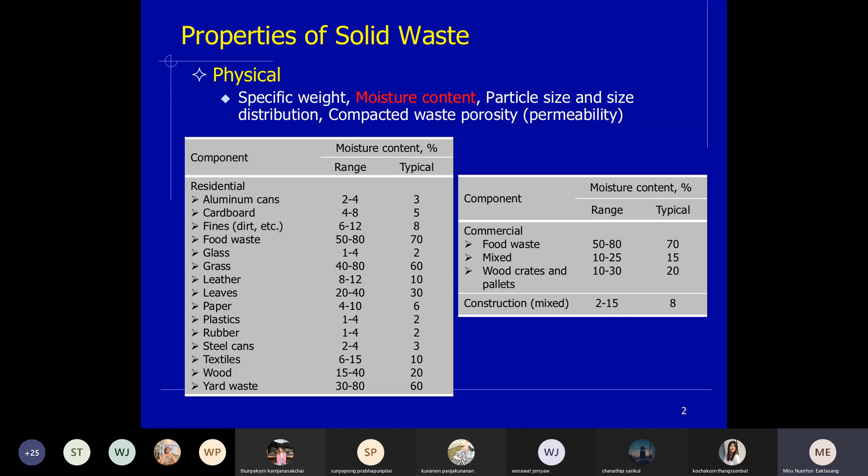Also for the other properties, like chemical property of the solid waste, for example proximate analysis, ultimate analysis, and energy content. This property is very important because it can be used for evaluating alternative processes and recovery options. For example, if we know the energy content, we can decide on a combustion process or use it as fuel or RDF resource from the solid waste.

Also, if we know the chemical property about elements like carbon and nitrogen, we can decide for making compost. An example of proximate analysis: normally we analyze the proximate for combustible components, meaning the volatile organic compound, the solid like total solid, and ash content.

I will explain more about the proximate analysis. For the ultimate analysis, it can be divided into three major analyses: the major elements like carbon, hydrogen, oxygen, nitrogen, sulfur, and ash. These are the major elements in solid waste that we have to know to design, sometimes we can use the benefits of this property for making compost, like knowing the carbon per nitrogen ratio that's appropriate for degradability or not.

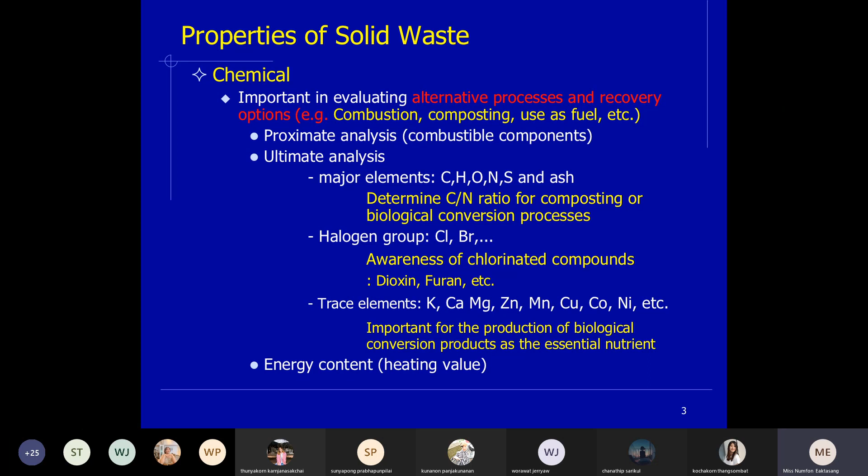The energy content is one parameter we have to analyze in the chemical properties, because if we want to use solid waste as an energy resource, we have to know what kind of solid waste contains a high heating value. If it's a low heating value, thinking about cost-benefit analysis, maybe it's not appropriate to make energy resources from a combustion process.

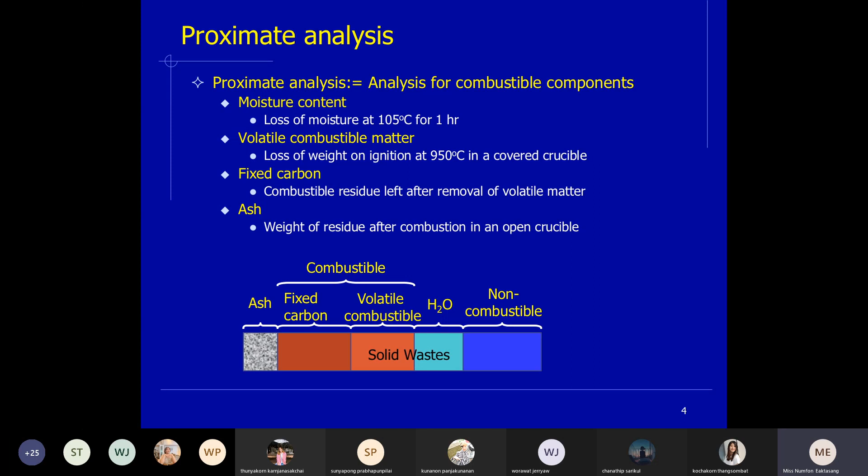This shows the proximate analysis. The proximate analysis is the analysis for combustible components, which consists of the moisture content, volatile combustible matter, fixed carbon, and ash. This is just an example of the proximate analysis we have to know in the chemical properties.

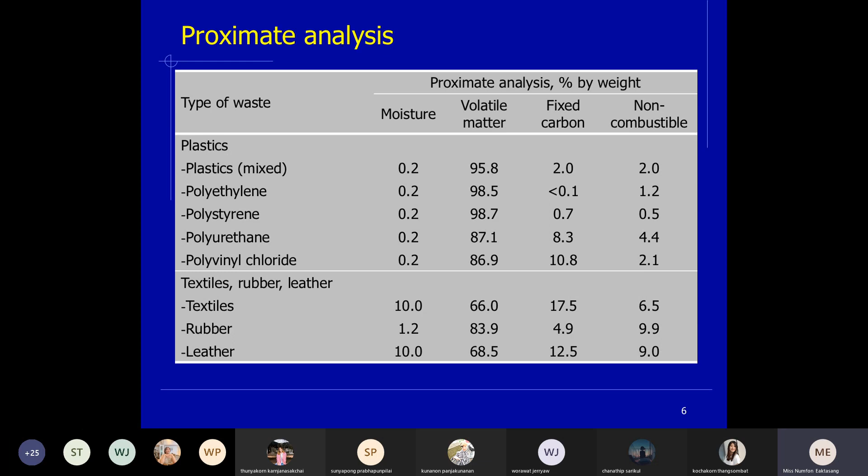This also shows different types like plastic, textile, and rubber. They also contain high volatile matter, so it's easy to burn. If we want to separate some kind of waste and feed it into the incineration process to use as an energy resource, we have to look at this property too - not only the heating value, but also the volatile matter and moisture content.

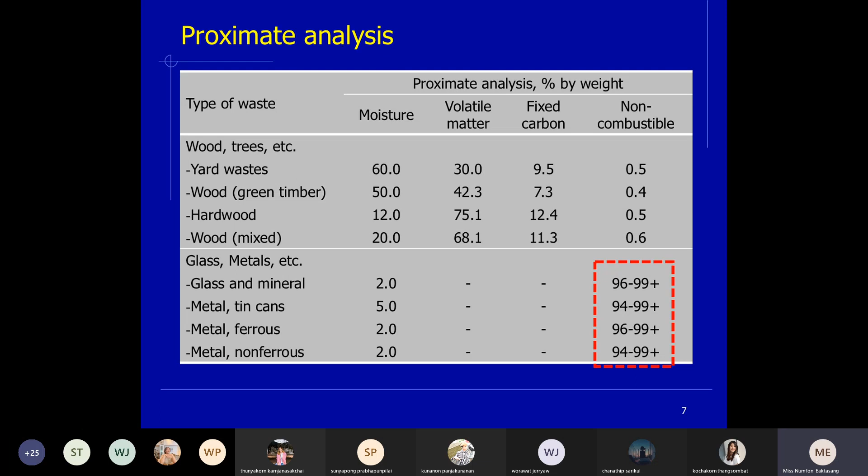You can see from other types like non-combustible waste - glass, metal, or tin cans - the volatile matter cannot be analyzed. It means it's low detectable, sometimes non-detectable, because it's difficult to burn. So we can separate this kind of waste as non-combustible.

The ultimate analysis is also a very important parameter - we have to know the carbon, hydrogen, oxygen, nitrogen, and sulfur content. The nitrogen and sulfur content is an important parameter because if solid waste contains high nitrogen and high sulfur, after the burning process - if we use incineration to dispose of the solid waste - it can cause nitrogen dioxide or NOx, and also sulfur dioxide, which is air pollution. If we know some solid waste contains high nitrogen and high sulfur, maybe we should separate it for disposal by other processes, like composting or landfill, rather than putting it in the incineration process.

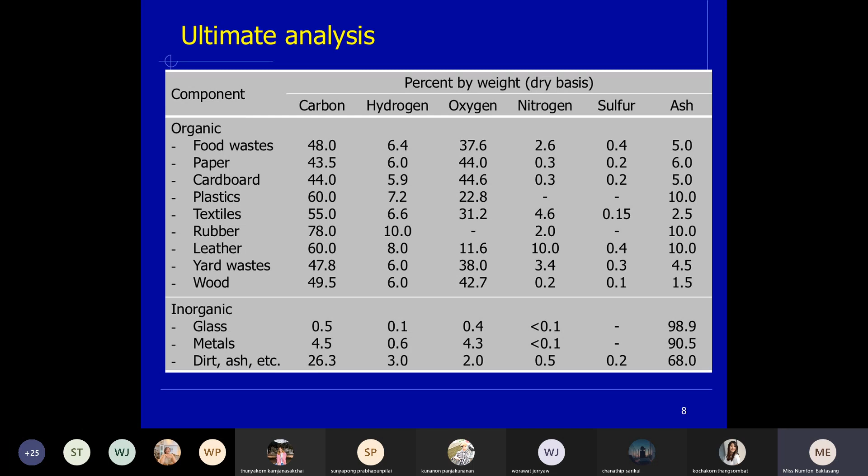It's quite different from the inorganic part. For the inorganic part, the ultimate analysis shows low carbon, low hydrogen, low oxygen. Normally we use the property of the ultimate analysis to determine the biodegradable process and the incineration process.

Another factor for chemical properties is energy content. As I said, if we decide to separate some kind of waste with high heating value to put into the incinerator and use it as an energy resource for waste-to-energy, we have to choose waste like plastic, textile, or rubber - they have quite high energy content. But compared to food waste, you can see food waste is lower than paper, plastic, or rubber.

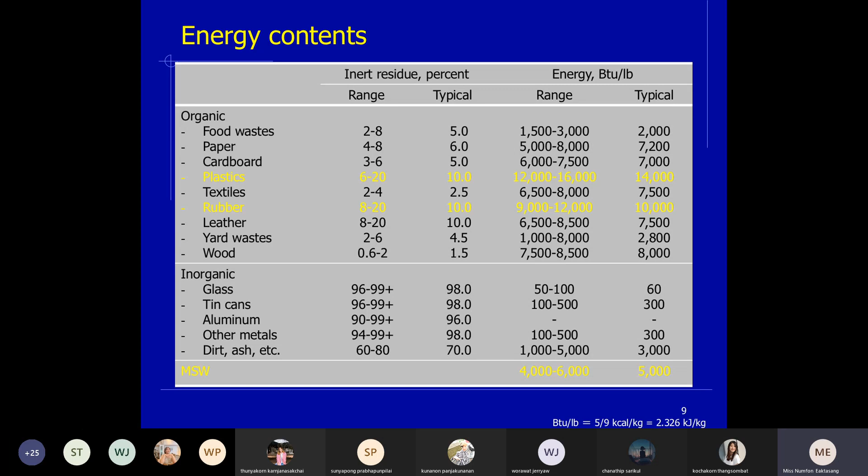This is because food waste also contains carbon, but the high moisture content can reduce the energy or heating value.

Another property of solid waste is the biological property. This is an important factor to look at in solid waste - whether it's easy to degrade or not. During the degradation process, there are aerobic and anaerobic processes, and some can cause a bad smell or bad odor.

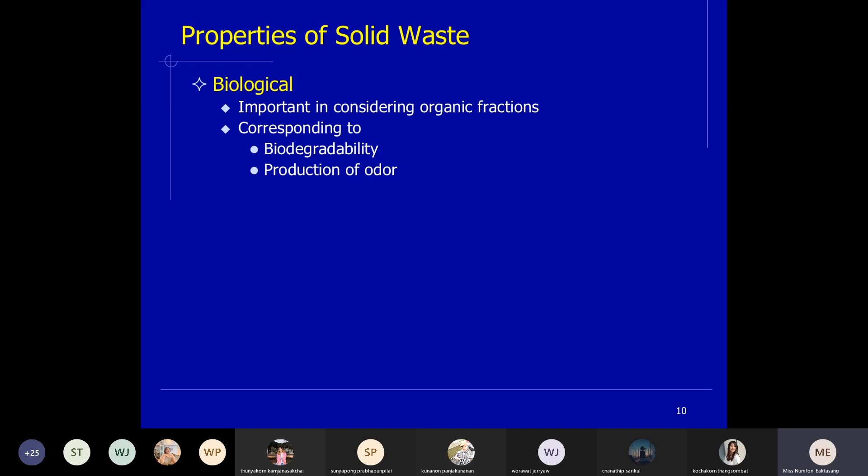The indicator to identify easy or difficult degradation in a biodegradable process: we look at the lignin content. If high lignin content, that means it's difficult for microorganisms to degrade. That's solid waste. We can look at lignin content as an indicator for biological degradability.

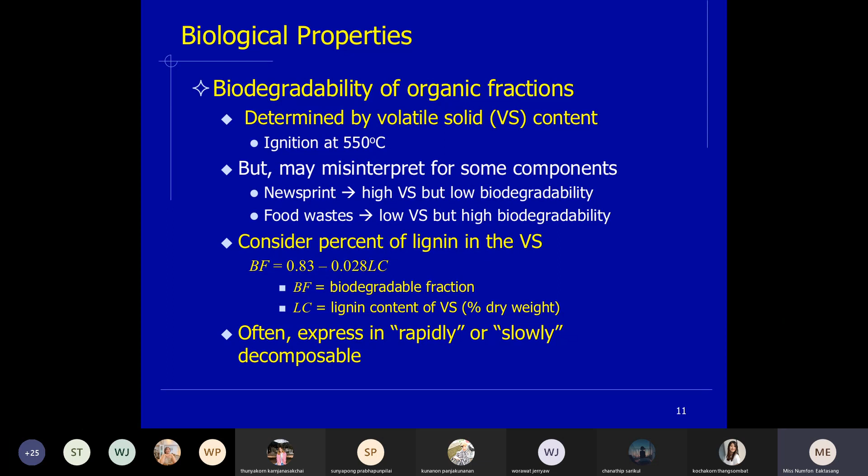We can know if it's rapid or slow during the degradable process if we know the contents of lignin. Another property is the production of odor, as I said, which is a biological property, meaning this kind of waste is easy to degrade.

It also contains some parts of sulfur. During degradation, it can cause sulfate to change to sulfide, and sulfide combined with hydrogen can cause a bad smell, like hydrogen sulfide. These are the bad odors.

That can occur from organic material, and also if it's easy to degrade, it can cause breeding of flies. This is the source of vector transfer of disease to humans or the environment. This is an important biological property of solid waste.

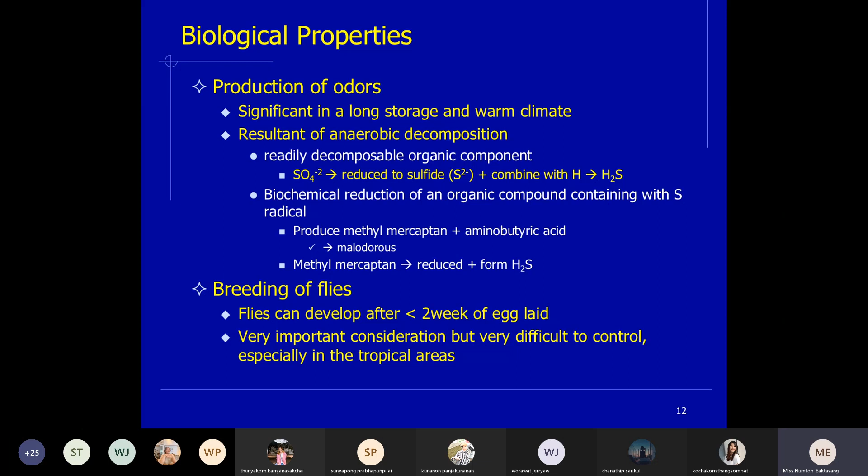After we know the property of the solid waste, we can design the appropriate transformation process. For example, if we know the size, heating value, proximate or ultimate content, we can decide if this kind of waste is appropriate for a combustion process or composting, something like that. Also, if we know the property, we can decide the recovery method.

Some kinds of waste have high energy content, so maybe we can use it as an energy resource. This is one method for recycling material to feed into making electricity, like waste-to-energy products.

This is the property of solid waste that we can use to design the collection system, transportation, separation, and processing to create other benefits. We can also design the disposal method appropriate to each kind of waste.

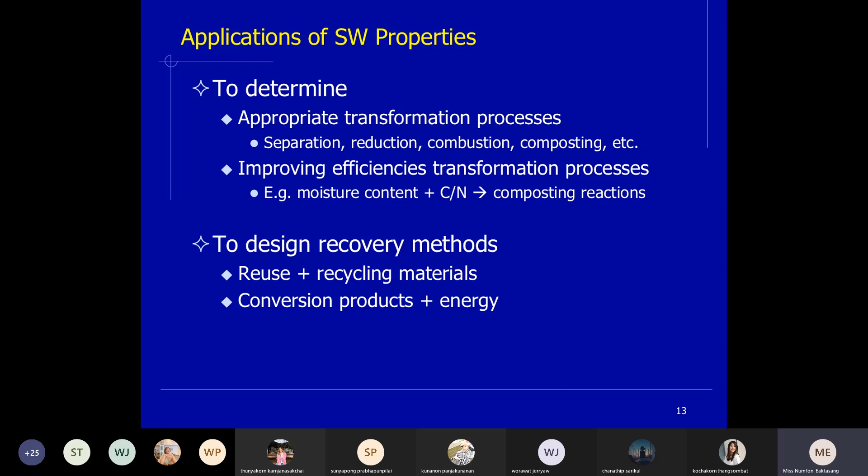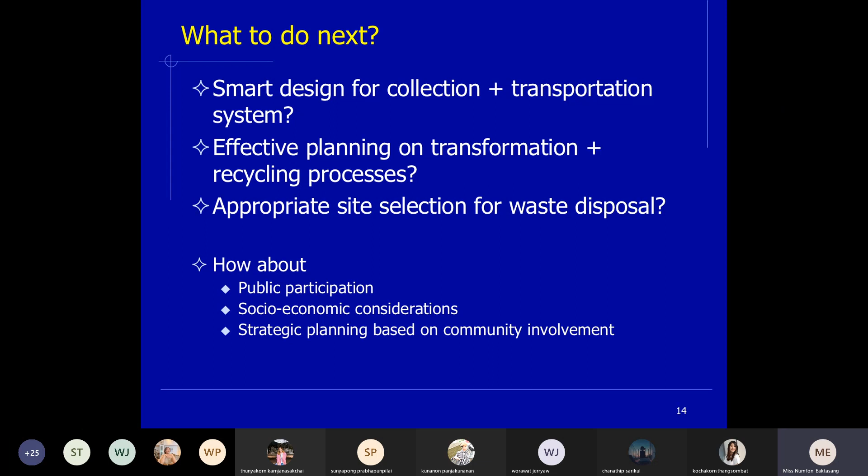After we know the properties, we can make smart designs for collection, transportation, or waste processing. This is an important factor we have to know before planning solid waste management for the future. This is the part about the properties or characteristics of waste that we have to know before we design the whole waste management system.

For today we have two sets of PowerPoints. I've finished the property of solid waste, and for the next PowerPoint, I want to talk about the waste reduction concept.

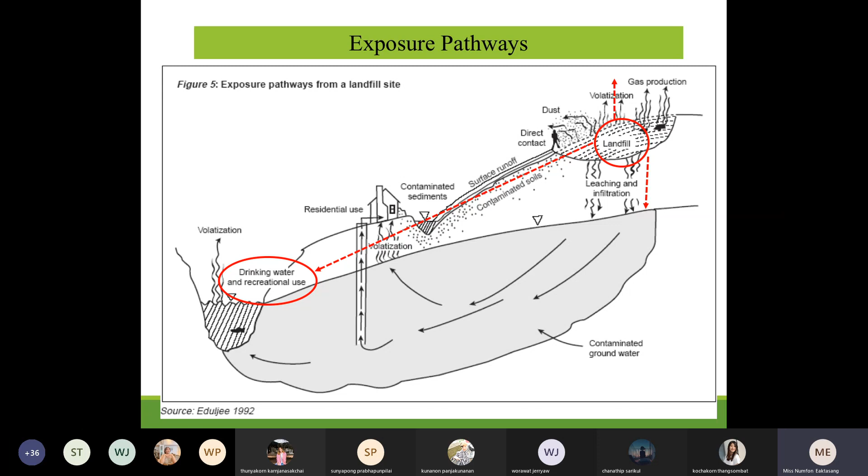That's why we have to control the solid waste disposal site to prevent contamination of the environment, because finally we live in the environment. If the environment is bad, like high air pollution and high pollution in the environment, finally it can affect human health, right? I just want to show you the exposure pathway that can transfer from the solid waste to human health, right?

And also, from the past to the present, solid waste management is quite different. In the past, solid waste management emphasized the disposal process. We didn't focus on the 3R concept, reduce, reuse, and recycle, or energy recovery. We just produced the solid waste and then disposed of it in the landfill site, or by open dumping or open burning, something like that.

But nowadays it's quite different, right? We have to think about how we can reduce the amount of final disposal waste. We think about integrated solid waste management. Sometimes waste is not waste. Sometimes waste can be a resource of energy, right? As an energy resource, it can make fuels or energy or electricity from the solid waste, right? Like the figure.

Nowadays we talk about integrated solid waste management. That means we focus on reduce, reuse, and recycle to reduce the final disposal amount of solid waste. We don't focus on the disposal method. Why? Because we know that these various methods finally can impact the environment and human health, like the incineration process or landfilling. And also now we don't have enough land to dispose of the solid waste, burying the solid waste in the land, right?

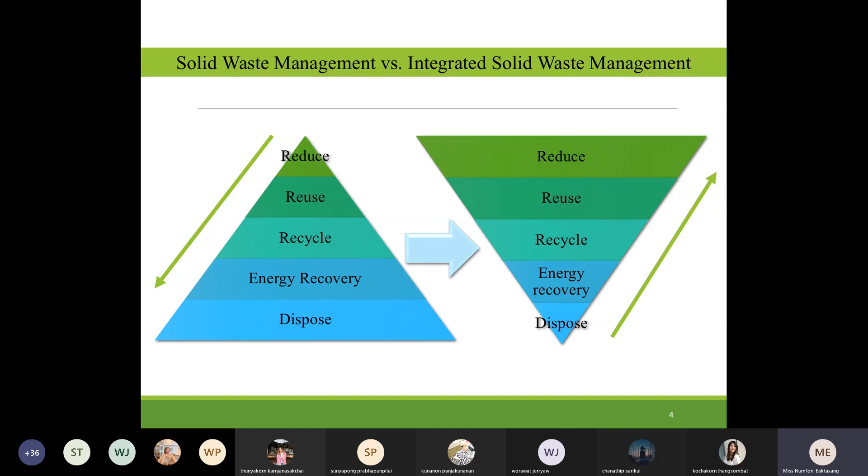We have to use the benefit from the waste. This is the objective or goal of integrated solid waste management. Nowadays, we try to reduce the amount of waste. If we cannot reduce, we think about whether it can be recycled or not. If it can be recycled, just separate and collect the kind of waste that can go to the recycling process, and then make a circular economy to get the benefit from waste again. Like waste processing to make energy from waste, like fuels, gasification or electricity.

This is the meaning of integrated solid waste management, not only produce and throw away. Just thrown, and after being thrown, just put into the disposal process: this is just waste management, not integrated solid waste management.

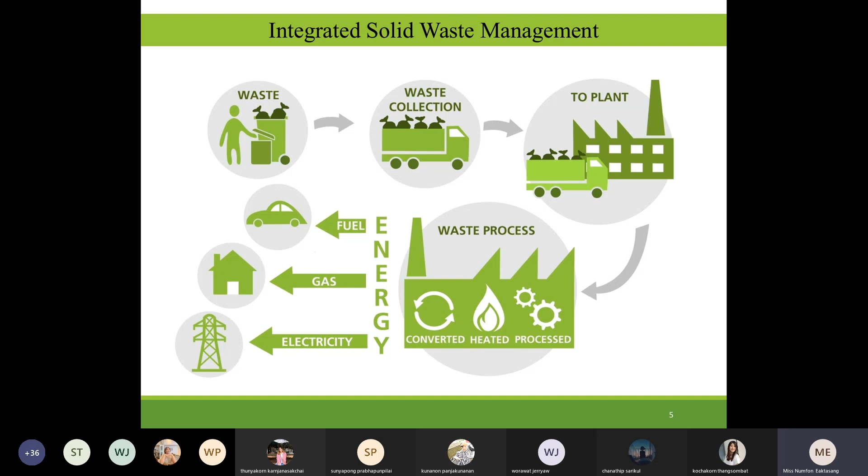And also, when we talk about integrated solid waste management, it consists of the following processes. After waste generation, the next process is waste reduction and separation at source. This process is very important nowadays, right? Because this is the first step to reduce the amount of solid waste, applying the 3R concept, reduce, reuse, and recycling. We can separate or reduce the amount of waste, what we call separation at source. That means at the household, right? And after that we have already reduced the amount of solid waste, maybe 5%, 10%, or 20%.

And then after we throw away, we come to waste storage, right? Then we have the next process, the collection system, collected by a private company or the local government, depending on that area, right? And after collection, there is a transportation process. Normally after transportation, we just transfer the solid waste to a disposal site like a landfill or dump site. But now we also try to set up separation, processing and transformation to get the benefit from waste again.

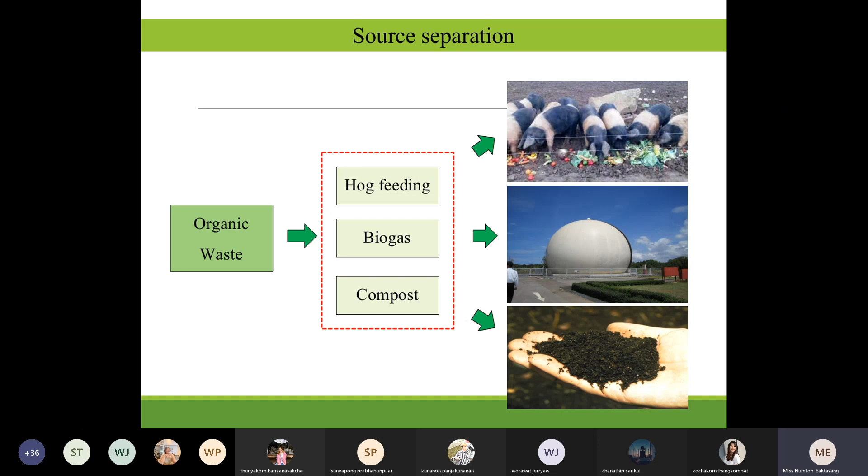The compost is not only made by the local government at a composting site, but like a compost bin in the household area. Some families try to use compost in their house or their households also. And for the other source separation, recycling waste like glass, paper, plastic, metal, and aluminum.

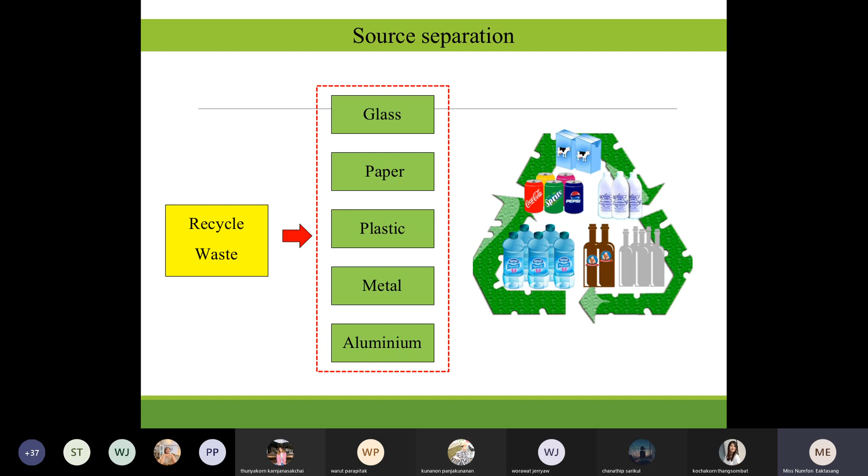This is just the five groups, but in each group they can separate into various types of that waste, like plastic. Plastic has many kinds. Some kinds of plastic can be recycled, but some kinds of plastic cannot be recycled, right? But we have to know the symbol or the material that makes that plastic to separate the kind of plastic. And this shows the glass, right?

Glass also has different kinds. Normally they separate it by the color of the glass. It's easy to transfer for the recycling process. And the papers also can be separated into white paper or brown paper, something like that. And also the kind of plastic waste that I said, some kinds of plastic waste are difficult to recycle, right? But if that packet has the recycling symbol like this, like the triangle of arrows,

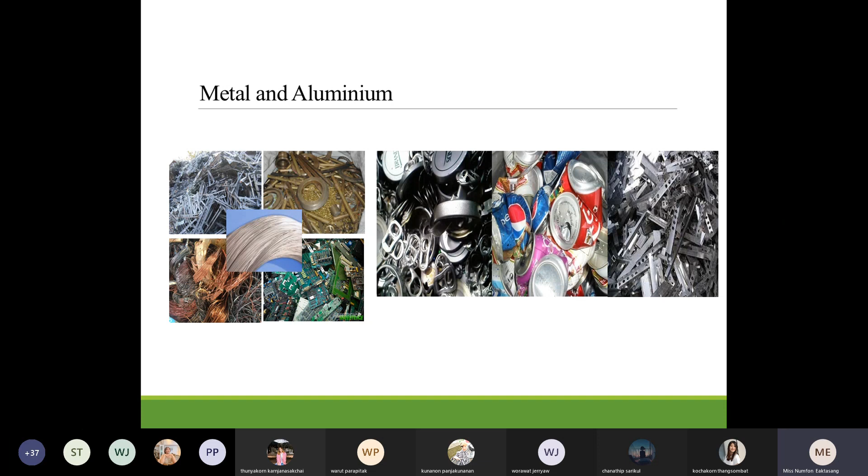you can see they have seven types of plastics, right? Based on the seven types, this plastic can be recycled, and also metal and aluminum can be recycled materials. And after we separate, I don't go into detail in each stage, right? But I just want to show you all the stages of waste management, and I will emphasize the waste reduction process and the waste separation and processing to make benefits or other options for waste recycling.

And this shows why nowadays we talk about a circular economy for plastic waste and also solid waste, not only plastic, right? From the past, every product that we use finally becomes waste, right? We call this a linear economy. That means we just take natural resources like petroleum to make plastic bottles in the industrial or manufacturing process, right? Take and then make the products.

After making the product, we go to the step of using the products, right? After we use the product, we just dispose, and the local government just collects the solid waste and then does some disposal process like landfilling or incineration, or open dumping or open burning. That's it for waste management from the past. We call it take, make, maybe add one word, use, right? Take, make, use, and then dispose. This is what we call a linear economy. We cannot get any benefit from that product after it becomes waste, right?

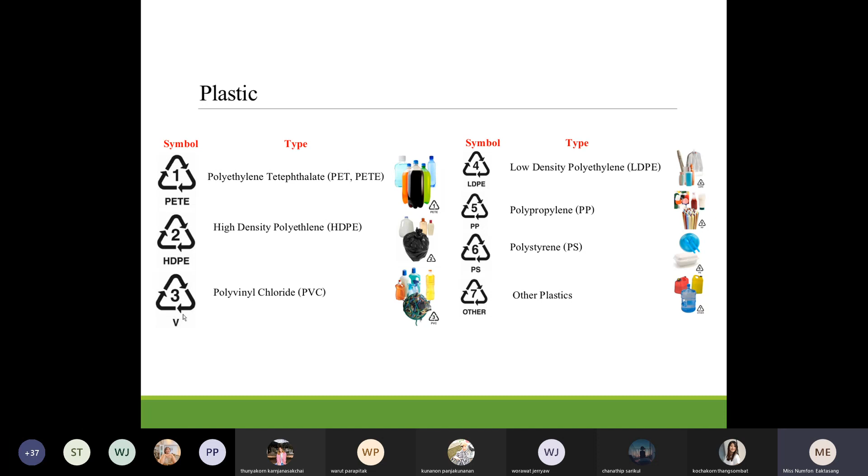And also they try to have the policy to separate the solid waste, the plastic waste. That is like the polyvinyl chloride, or like PET, polyethylene terephthalate, right? This can be easy to use as material in industry again. That's why some companies try to design their products for a circular economy, to make the loop of upcycling of their products also. This is what we call the circular economy.

If we look at the difference between linear and circular, that means we can reduce the amount of disposal waste, right? The waste that goes to the final disposal process. And not only that, but we can get benefit from waste also. As I said, maybe the waste is not waste. Waste may become a resource or a raw material again in the manufacturing process. This is the circular economy.

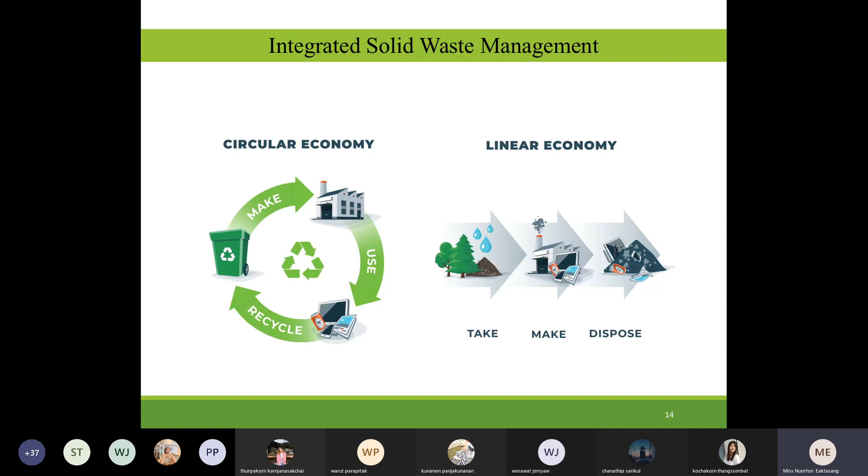This is just the first step in Thailand. But other countries, like developed countries, are also concerned about this policy. Maybe some countries already succeed with the circular economy. Maybe I will show you a case study about circular economy in future lectures, right? For the next lecture. And this just shows you solid waste becoming a resource, right? A resource of the circular economy.

But sometimes it's not only the after-use product that becomes waste when we think about the circular economy. Sometimes the producer, like the company, has to design their product for the environment, or rethink a redesign of their product for the circular economy also. Normally we know about three concepts, right? The three R: reduce, reuse, and recycle.

But for the future, maybe we will hear about reduce, reuse, and remanufacture. That means recycling is changed to remanufacture. That means the circular economy feeds into the raw material of the industrial process again. This is the idea of the circular economy.

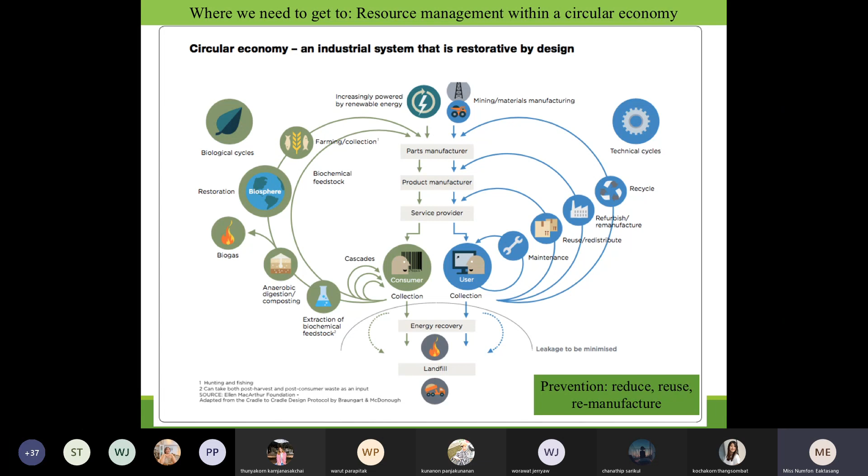For example, if you treat the solid waste by landfill, right? We know the landfill produces greenhouse gas like methane, because of the degradation process, right? Under anaerobic conditions, it can produce methane and carbon dioxide. We know methane can be used for electricity generation, right? So we can use the products of the landfill and feed them into electricity generation also. This is circular. That means we can get benefit from waste also.

And this also shows that before we think about the circular economy, maybe we have to make the life cycle of that material. We have to know the life cycle, what kind of resource is used before manufacture. For example, if we want to know about paper, right? Paper is made from wood, so the raw material is wood. Then the manufacturing process, then we get the paper product, and after use, we have to know all the processes, and how we can dispose of it based on the properties of the paper, right? To decide on the circular product.

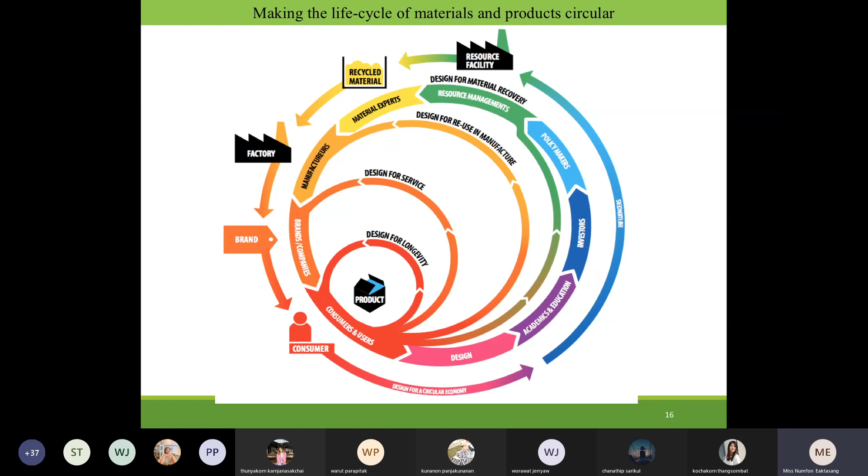Maybe the company has to think first about their product before they produce it to sell to customers, right? Some part we focus on the customer, but some part we focus on the manufacturing process or producer. And you can look at what kind of loop we can add for circular, right? Maybe the product is the first loop, something like that. And for the third loop, maybe design for reuse in manufacture. Maybe we design plastic bottles or glass bottles with some base grade of plastic, something like that, to reuse again for the industry.

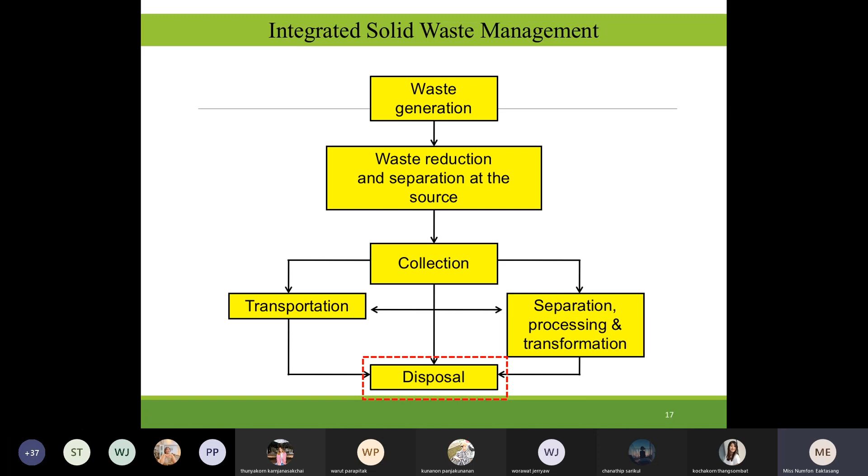And also, after we know the concept of how we can use the benefit from the waste in terms of the circular economy, the final process that I want to focus on from this flowchart is the disposal process. The disposal process consists of many processes, depending on the kind of solid waste. But normally, in Thailand, the percent of separation of the solid waste is quite low.

Maybe we get the mixed waste, right? For the mixed waste, sometimes it's difficult to do further disposal processes. And this is what I want to show you about the disposal methods. The first is open dumping and open burning. Open dumping and burning are raw methods. Both methods can cause air pollution and environmental pollution, right? I will show you later.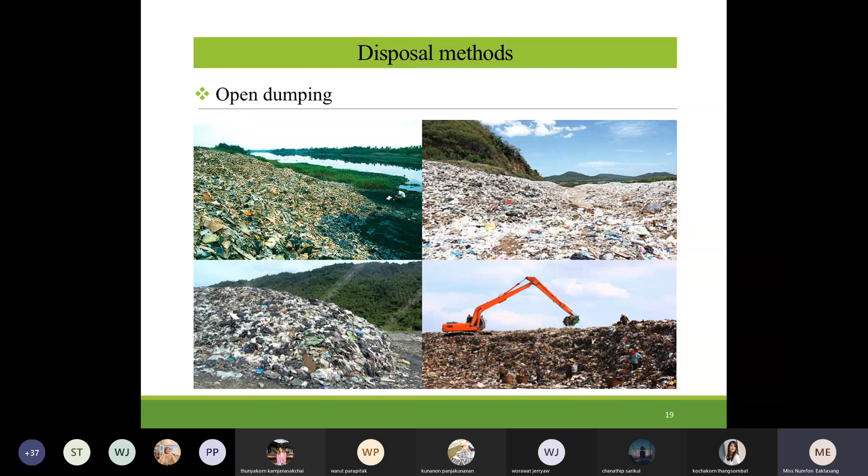The solid waste is also related to global warming and climate change, because the source of solid waste can produce greenhouse gas, right? Not only open burning, but landfilling also, and composting also; many processes of waste management can cause greenhouse gas. And not only environmental pollution, but human impacts can also occur from open burning, like respiratory impact or irritation.

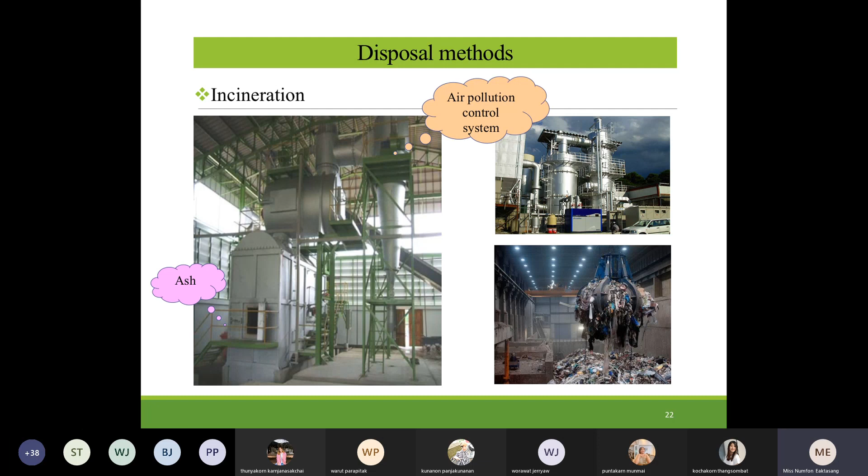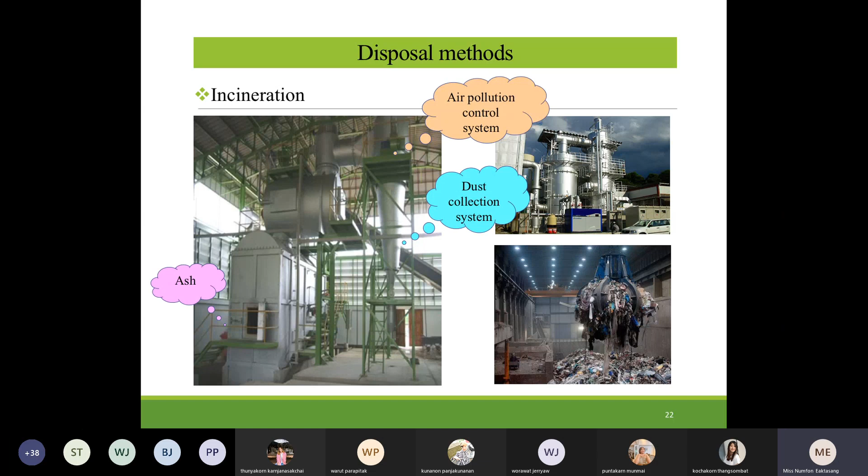But after the air pollution has occurred, they connect to treatment equipment, right? To treat the air before releasing clean air into the environment. We call it an air pollution control system, and a dust collection system also, to remove the small particles from the flue gas before release into the environment, right? This is the incineration process.

Why is the incineration process very interesting nowadays? Because it can reduce a huge amount of waste, right? It's quite different from landfilling, right? In landfilling, we put 1 kilogram into the soil. That means maybe it takes many years to degrade, right? The volume is slowly reduced, right?

But if compared to incineration, maybe we burn 1 ton of the solid waste, and in maybe 1 hour it disappears, right? This is why incineration of solid waste is very important, and also it can remove bad smells, right, during the burning process. And also this process can dispose of hazardous material.

But the concern is about the ash after burning. Sometimes it contains hazardous material. The ash may contain heavy metals. We cannot dispose of all the ash into general landfills, right? Maybe we have to mix in some cement and put it into a secure landfill, not only the general landfill, right?

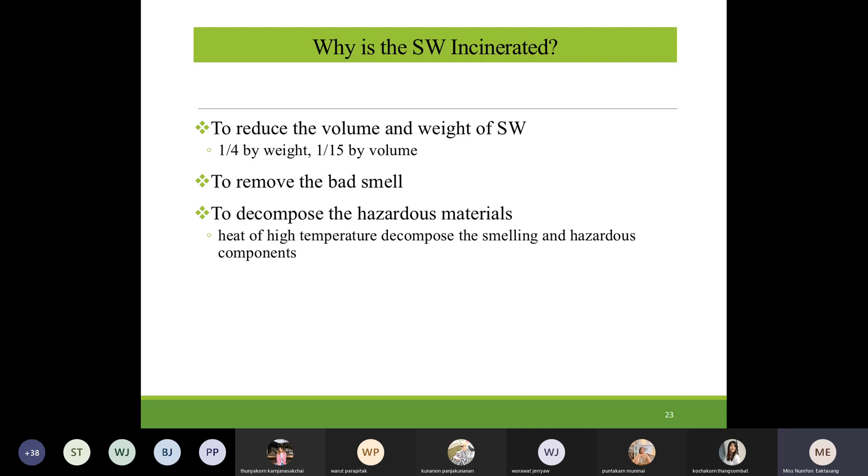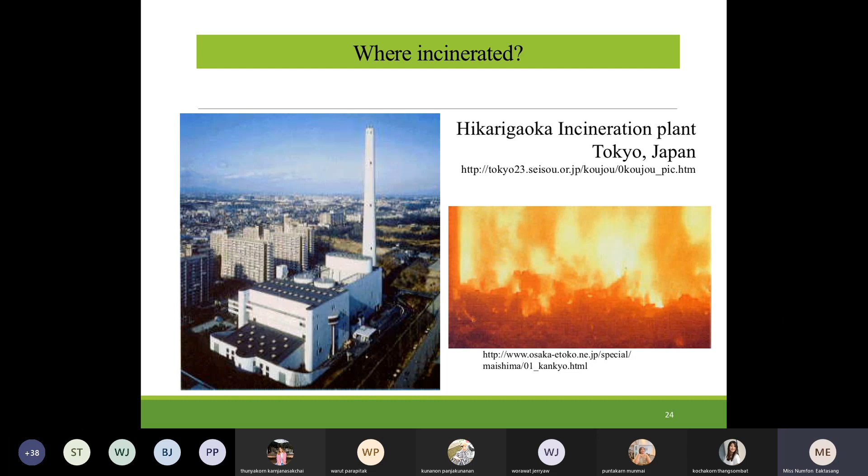But it's quite different from Thailand, right? Thailand has mixed waste. If we put mixed waste into the incinerator, with high moisture content, we need to consume a lot of energy before producing energy, right? And also in Japan, they use the energy from the incineration process to make electricity, a waste-to-energy concept, to get benefit from waste management.

And this just shows the incineration plant. I don't want to go into more detail. I just want you to know that after collection, it's dumped into the incineration plant and then put into the incinerator, in the chamber, and after burning we get ash, right? And the flue gas has a high temperature. We can connect it to the system to generate electricity.

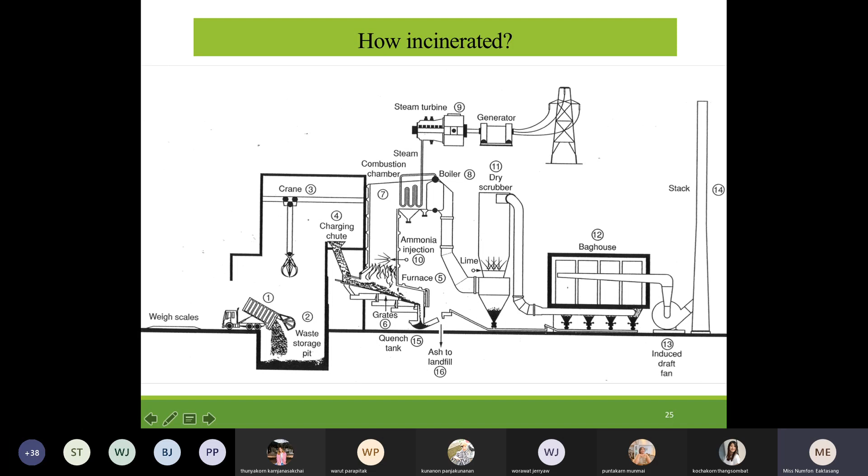And the dirty gas, we just use its high temperature, right? But the contamination of the flue gas is still in the system, right? We have to cool down that gas and remove particles from it to make clean gas before it's released into the environment from the stack. The pollution control of the incineration process: particulate matter occurs during burning, like black carbon or small particles, which we can remove using an electrostatic precipitator to make clean air, right?

And also NOx and SOx: if the waste contains nitrogen and sulfur, right, it can produce NOx and SOx after burning. We can remove the NOx and SOx by injecting some chemicals, wet chemical or dry chemical, to create a reaction that removes them.

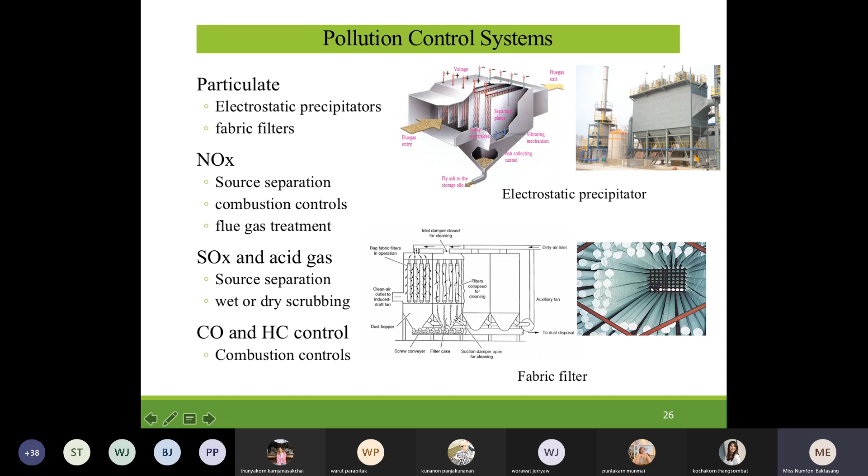And carbon monoxide and hydrocarbons normally occur during combustion. If combustion happens with low oxygen, it can cause carbon monoxide, right? That's why in the incineration process we have to calculate how much oxygen we need to input for burning the solid waste. It's complete combustion to prevent carbon monoxide and hydrocarbons, right? This is the pollution control system in an incineration process.

And also the ash. After ash occurs, it consists of a light part and a heavy part, the fly ash and bottom ash. For fly ash, we use air equipment to remove the small particles, like dust removal. But the bottom ash, as I said, sometimes contains hazardous material if we burn hazardous waste, right? We have to collect it and put it in a secure landfill, or mix in some cement to stabilize the bottom ash, if it contains hazardous material.

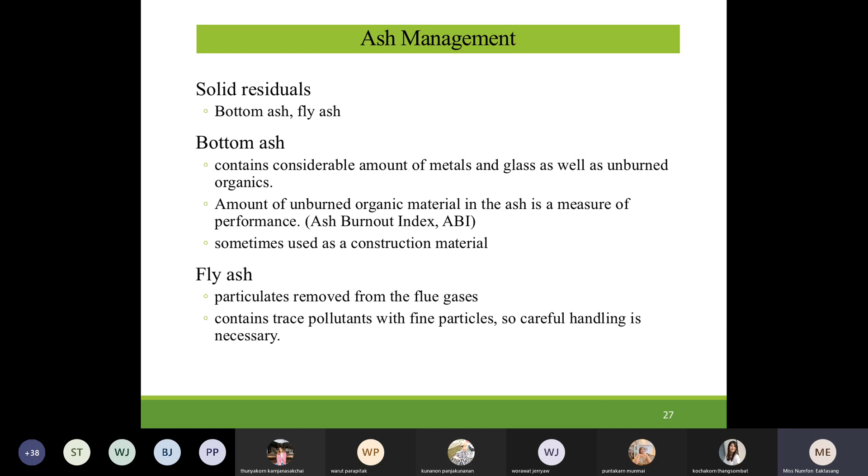If it doesn't contain hazardous material, we still have to analyze the ash before we dispose of it, right? If it's normal ash without hazardous material, we can just put it in a sanitary landfill. That's enough for ash management. But nowadays they use bottom ash and fly ash for manufacturing too, mixing it with cement to make bricks or roads, something like that. They try to get benefit from the solid waste.

And the incineration process is important for energy recovery too. If we burn solid waste with a high heating value, right, we can get high energy from the flue gas, right?

We can use the benefit from the waste form to make electricity also, or heat, like steam or boiler in industry. This is how we can get benefit from waste by converting it to energy resources.

Sometimes we cannot use 100% energy recovery from waste, but maybe just as a supplement, maybe 10% or 20% of original energy. Normally if your industry uses energy from coal or fuel from coal, and you use cogeneration from waste recovery for 20%, that means you use coal for 80%. You can reduce the amount of coal to support the energy sources of your industry. This is what we call a cogeneration system, using both thermal and electricity production in the industry.

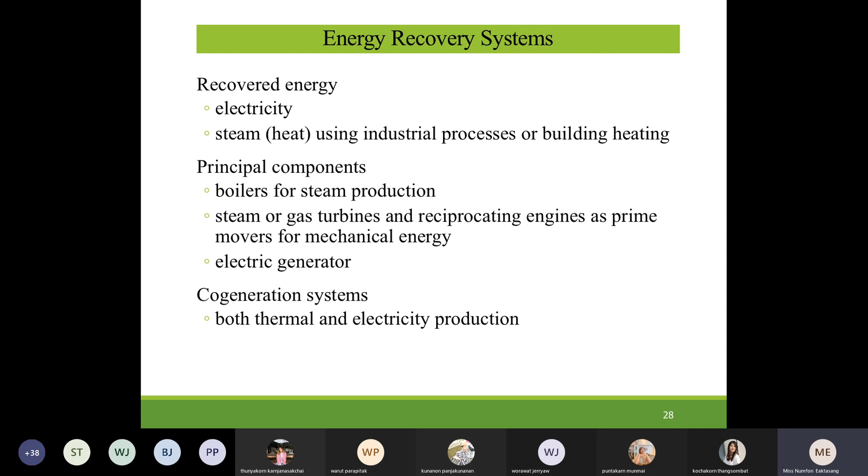The composition of solid waste in Thailand is such that normally we cannot separate it completely, 100%, for each kind of waste. It's quite difficult to fit into the stock of the burning process.